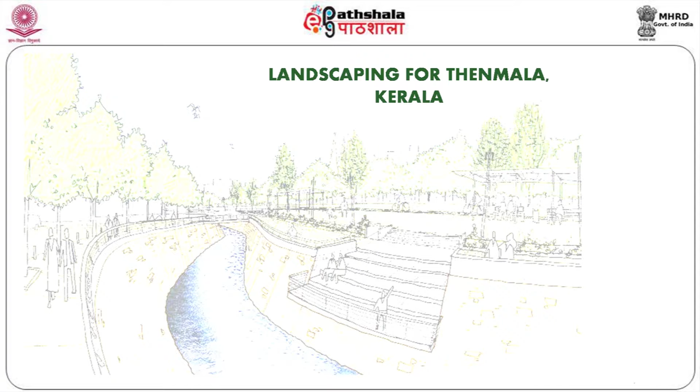So here today we are going to talk about Thenmala, which is further down of Thiruvananthapuram in Kerala. It's a beautiful setting area where the land actually belongs to the forest department. We already have some kind of adventure sports parks available, and some eco parks are available. Then we have one of the best tree walking facilities available.

People can walk on the tree. You have a platform on the higher level where people can walk along the tree level, and you go almost to the height of 60 or 70 feet and walk and see the canopy for yourself. You don't have to be a monkey to climb the tree to understand what a tree is, but you have a nice walkway and experience it as tree walking.

This particular area is also very famous for some kinds of fishes available here, and this dam is a huge dam with very good water potential. River rafting and a lot of sports activities are happening here.

Considering all this activity, we need to develop this dam as one of the major breathing spaces for the people. So you can watch the river, you can write a poem, you can read a book, you can do anything in the natural setting, which is more important.

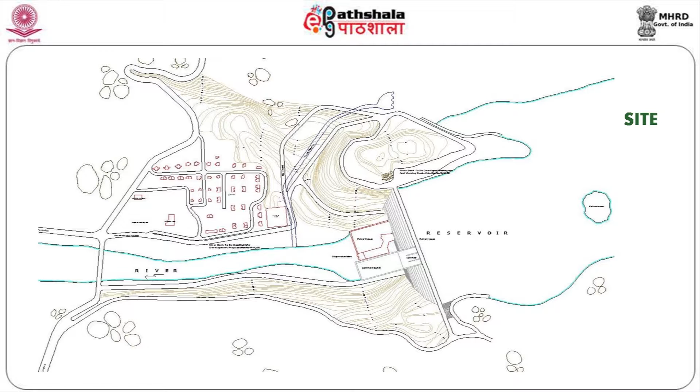This is the Thenmala dam. You have a mountainous terrain. Any dam is constructed on a higher plane, the river is flowing from uphill to downhill, so you have to choose between two mountain areas and construct a wall across so that you can store the water.

So basically the design idea is developed in such a way that we have a lot of activity-based landscaping, and some cottages are proposed at the higher level, so people can view from the top area to the bottom area, and they can also enjoy the nature and stay there.

A lot of walking vantage points are created with the trees and other things. Mostly trees, we want to create biodiversity here, so different varieties of trees are being planted here, so that when a person comes here they will see a totally different landscape altogether.

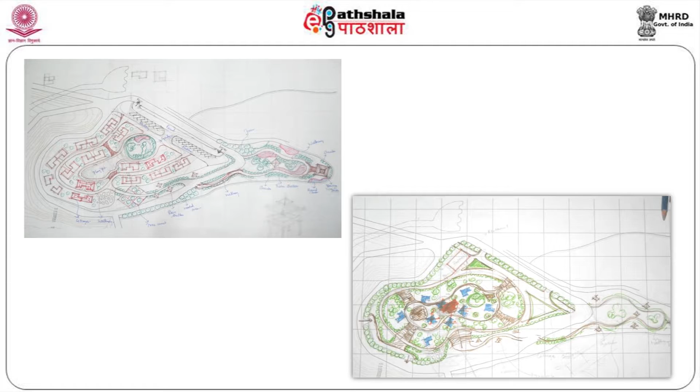These are all handmade sketches which we are showing, ultimately converted into the working drawings. This is the overall working drawing here.

The upper level is on the right side, then lower level connecting walkways at different levels—people get down, and they don't get down continuously, they get down in a slow pattern with gazebos in between, and people can climb down slowly, come to the lower area. You have a motorable track to go to the upper level, and you have parking facilities also on the upper level, and a walking promenade along the river with a boat jetty facility, check dam and water storage area available at the lower level, because upper level water is being used mainly for irrigation purpose.

This cannot be allowed to be spoiled by tourists, as it serves drinking water purpose and irrigation purpose. Even the lower level is not allowed to be polluted. In this area, we have control over the pollution.

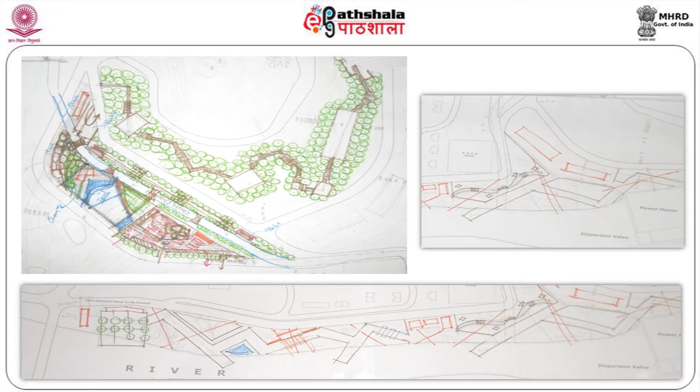So you can see the master plan yourself. Then cottages, play area, suites, parking areas, all the facilities that are required, this area has been provided.

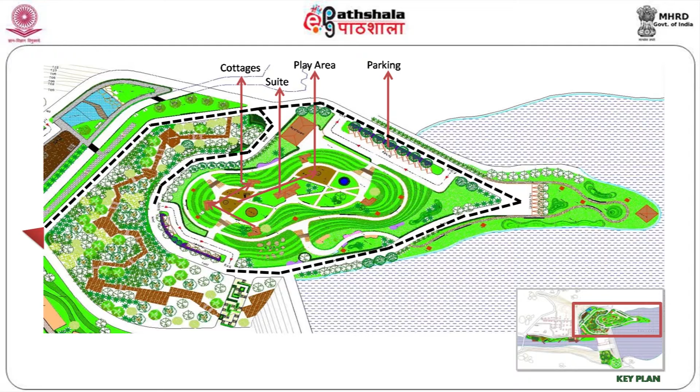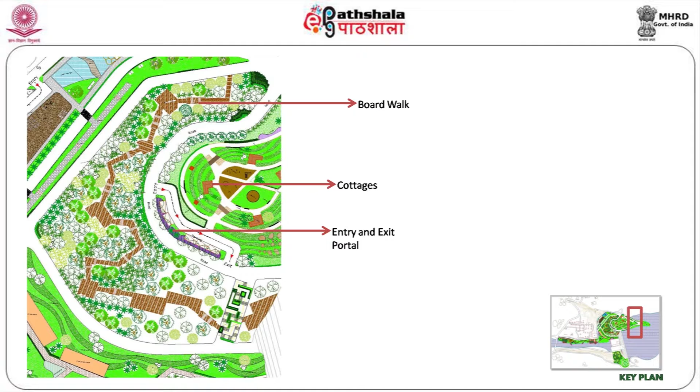Then entry and exit portals are created, cottages are there, and you have an excellent boardwalk available. Then you have some small security room, swimming pools are provided, some fountains are there in the rock and can act as a waterfall for the people to enjoy.

These areas, what is very important is you have to create an activity for the people. What kind of activity, and what is different from other places? When we talk about Malampuzha Dam, we have fountains and a swimming pool. Here the swimming pool is there with a waterfall. But both are far away from each other - Malampuzha caters to north Kerala since it's near Palakkad or Coimbatore, while this is down south, connected to Trivandrum, Kanyakumari, and Kollam area. So it caters to different populations, and what is required for them is also equally important.

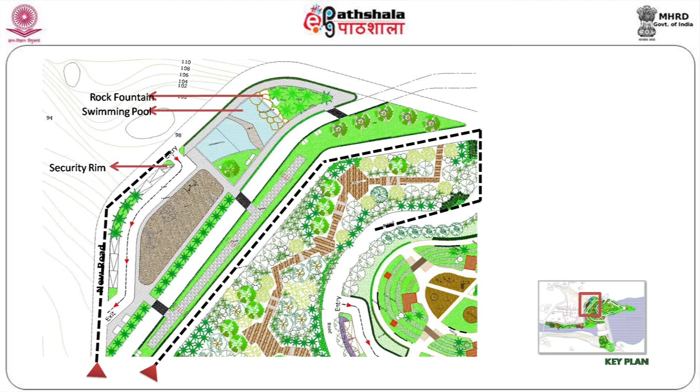Then existing buildings need to be converted to some kind of activity - can be converted into a restaurant or maybe converted into some kind of selling area, things like that. Then you need to control soil erosion by having a slope lawn.

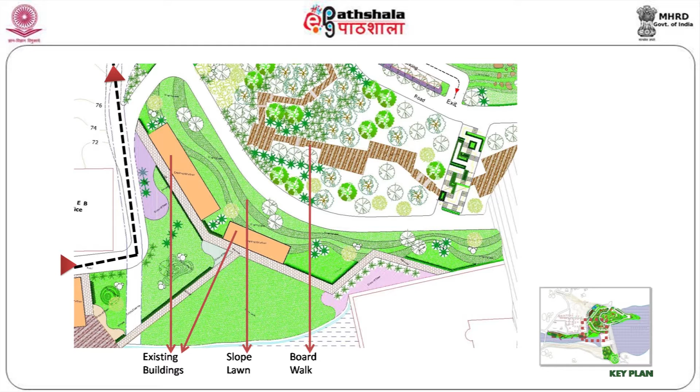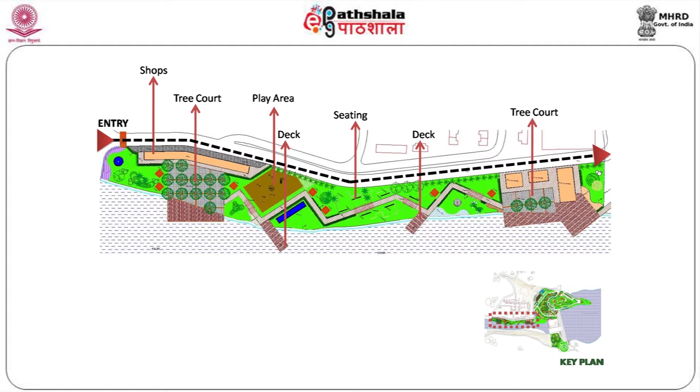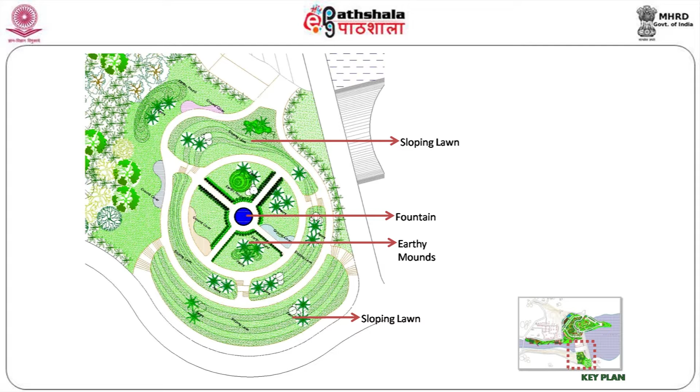Then you have a central fountain. Then you have earthy mounds. Sloping lawns are created on the upper deck. Then you have different views there.

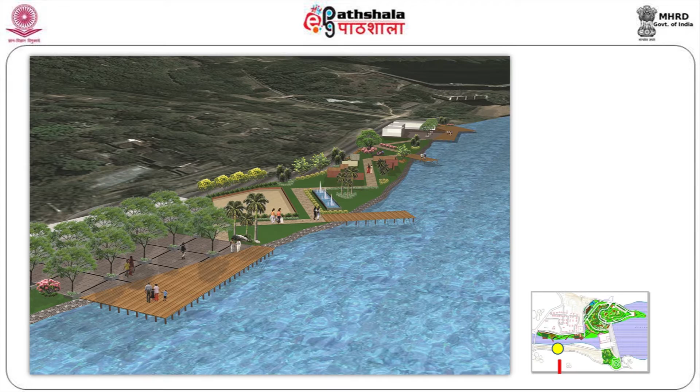This is the overall picture of how you conceive the idea and how you execute it. Once you provide all these kinds of facilities, people will really use these places. What is more important is that people come here from the city with lots of pollution and other things - they come here for relaxation, to enjoy the place.

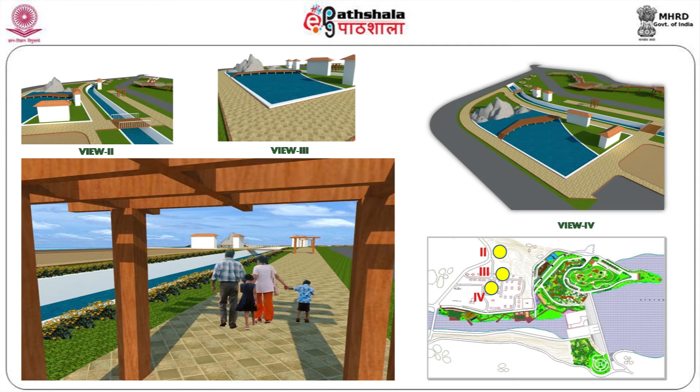Different fountains are there, walkways into bridges, decks, large walkways, tree courts, colorful plants, and aroma plants. When water is flowing, and there is a lot of water flow, it really improves the microclimate, calms down your brain and anger, and the high temperature in the body comes down so you feel very happy over a period of time.

Even we had an experience of going in a boat in Alappuzha backwaters, where after 15 minutes in the boat you really calm down and enjoy the surroundings - you stop talking on the phone, you stop talking, you just watch and enjoy the chill breeze. That is more important for you.

So these are all the views of the pergolas, views of the decks, swimming pools, and walkways. As I was telling earlier, we were discussing in detail the design elements of different items located in Thenmala.

The major thrust is on open space development, using the slope to advantage to create different steps, landing points, and different level points catering to different activities, and how people will come down using the contour properly and go up or down to different locations.

You also need to take care of your cut and fill so that you don't cut more and you don't fill more. These kinds of technical details are very important when designing in a hilly terrain like this. After solving all those issues, you will come to a conclusion wherein this particular dam will ultimately become a very good tourist destination and a breakaway point for the public.